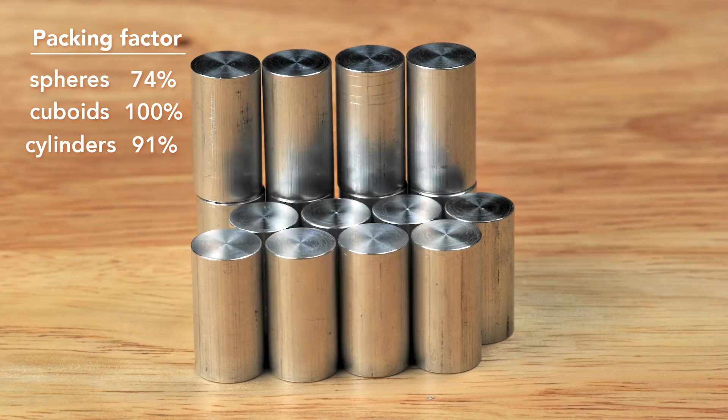But the cuboid surpasses the sphere in packing efficiency. It has almost no wasted space, although at the sacrifice of using more surface area to contain the same volume as the sphere. So, to create a can, engineers use a cylinder, which has elements of both shapes. From the top, it's like a sphere, and from the side, it's like a cuboid. A cylinder has a maximum packing factor of about 91%, not as good as the cuboid, but better than the sphere. Most important of all, the cylinder can be rapidly manufactured.

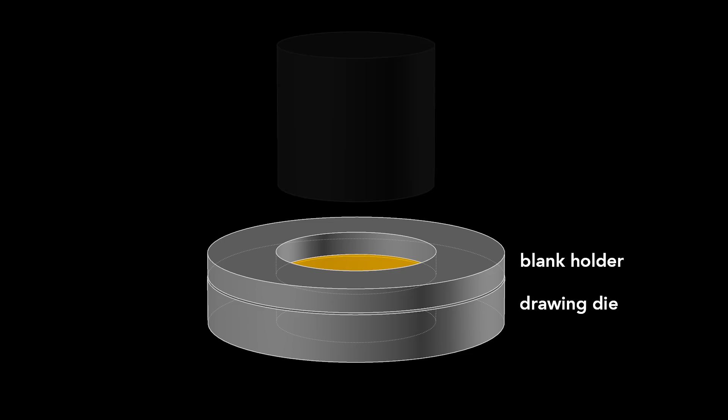The can begins as this disc called a blank, punched from an aluminum sheet about 3/10 of a millimeter thick. The first step starts with a drawing die, on which sits the blank and then a blank holder that rests on top. We'll look at a slice of the die so we can see what's happening. A cylindrical punch presses down on the die, forming the blank into a cup. This process is called drawing.

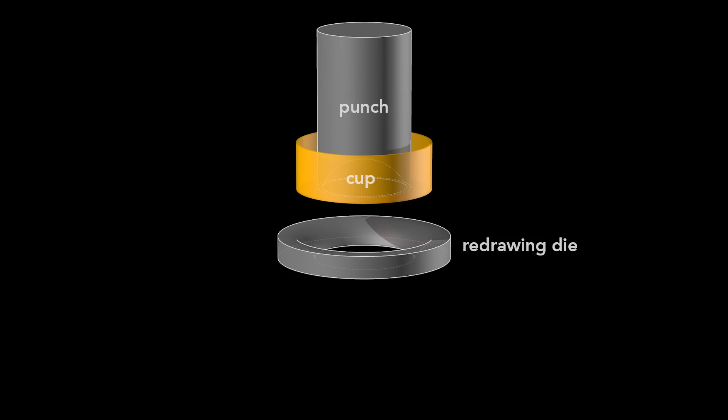This cup is about 88 millimeters in diameter, larger than the final can, so it's redrawn. That process starts with this wide cup and uses another cylindrical punch and a redrawing die. The punch presses the cup through the redrawing die and transforms it into a cup with a narrower diameter, which is a bit taller.

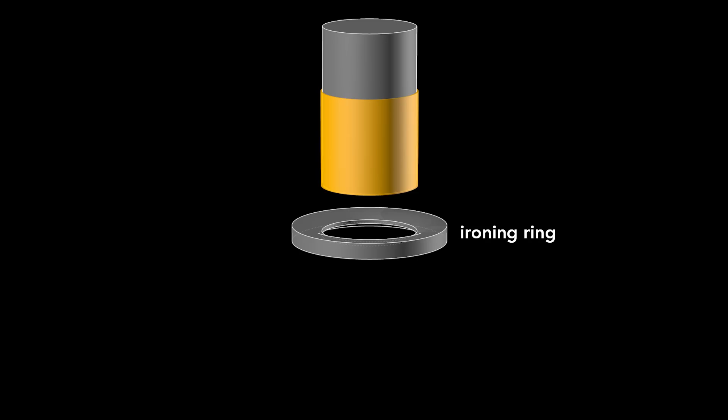This redrawn cup is now the final diameter of the can, 65 millimeters, but it's not yet tall enough. A punch pushes this redrawn cup through an ironing ring. The cup stays the same diameter as it becomes taller and the walls thinner. If we watch this process again up close, you see the initial thick wall and then the thinner wall after it's ironed. Ironing occurs in 3 stages, each progressively making the walls thinner and the can taller.

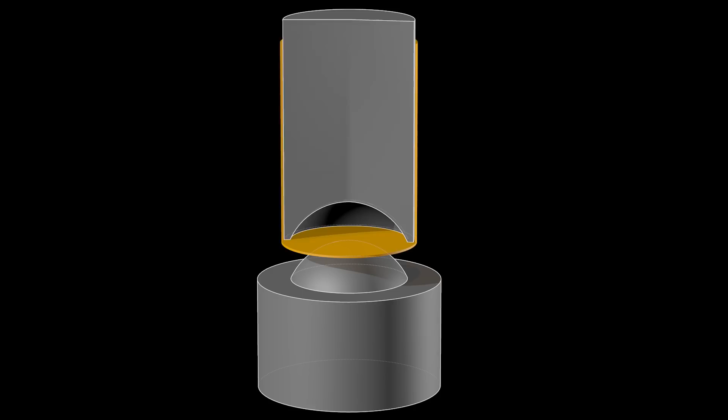After the cup is ironed, the dome on the bottom is formed. This requires a convex doming tool and a punch with a matching concave indentation. As the punch presses the cup downward into the doming tool, the cup bottom deforms into a dome. That dome reduces the amount of metal needed to manufacture the can. The dome bottom uses less material than if the bottom were flat.

A dome is an arch revolved around its center. The curvature of the arch distributes some of the vertical load into horizontal forces, allowing a dome to withstand greater pressure than a flat beam.

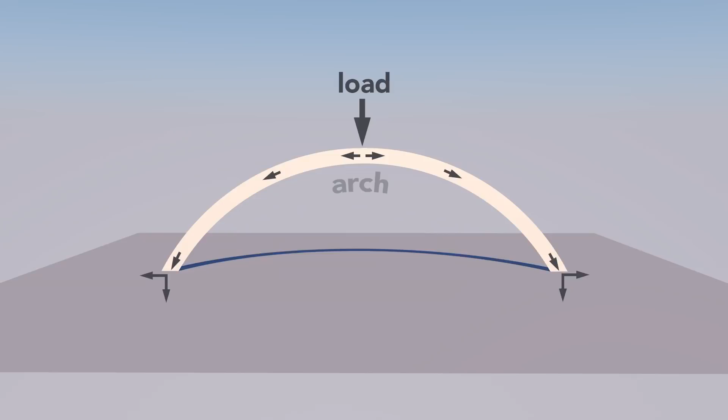On the dome, you might notice 2 large numbers. These debossed numbers are engraved on the doming tool. The first number signifies the production line in the factory, and the second number signifies the body maker number. The body maker is the machine that performs the redrawing, ironing, and doming processes. These numbers help troubleshoot production problems in the factory.

In that factory, the manufacturing of a can takes place at a tremendous rate.

These last three steps, redrawing, ironing, and doming, all happen in one continuous stroke in only 1/7 of a second. The punch moves at a maximum velocity of 11 meters per second and experiences a maximum acceleration of 45 Gs. This process runs continuously for 6 months, or around 100 million cycles, before the machine needs servicing.

Now, if you look closely at the top of the can body, you see that the edges are wavy and uneven. These irregularities occur during the forming. To get a nice, even edge, about 6 millimeters is trimmed off the top. With an even top, the can can now be sealed.

But before that sealing occurs, a colorful design is printed on the outside. The term of art in the industry is decoration. The inside also gets a treatment: a spray-coated epoxy lacquer separates the can's contents from its aluminum walls. This prevents the drink from acquiring a metallic taste and also keeps acids in the beverage from dissolving the aluminum.

The next step forms the can's neck, the part of the can body that tapers inward. This necking requires 11 stages. The forming starts with a straight-walled can. The top is brought slightly inward, and then this is repeated further up the can wall until the final diameter is reached. The change in neck size at each stage is so subtle that you can barely tell a difference between one stage and the next.

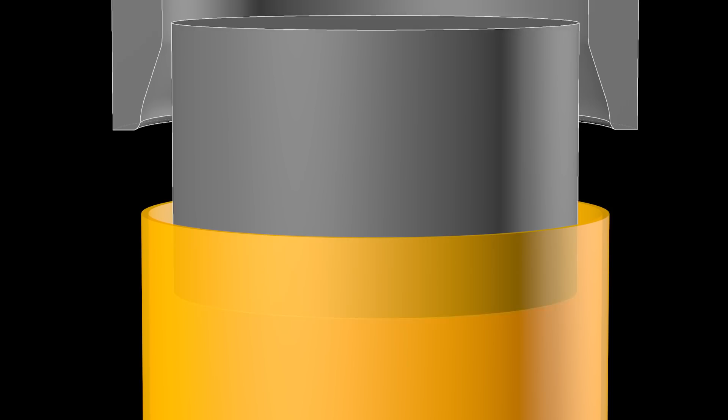Each one of these stages works by inserting an inner die into the can body, then pushing an outer die, called the necking sleeve, around the outside. The necking sleeve retracts, the inner die retracts, and the can moves to the next stage. The necking is drawn out over many different stages to prevent wrinkling or pleating of the thin aluminum.

Since the 1960s, the diameter of the can end has become smaller by 6 millimeters, from 60 millimeters to 54 millimeters today. This seems a tiny amount, but the aluminum can industry produces over 100 billion cans a year, so that 6 millimeter reduction saves at least 90 million kilograms of aluminum annually. That amount would form a solid cube of aluminum 32 meters on a side. Compare that to a 787 Dreamliner with a 60-meter wingspan.

Now, after the neck has been formed, the top is flanged. That is, it flares out slightly and allows the end to be secured to the body, which brings us to the next brilliant design feature: the double seam.

On older steel cans, manufacturers welded or soldered on the ends. This often contaminated the can's contents. In contrast, today's cans use a hygienic double seam, which can also be made faster. This can is cut in half so you can see the cross-section of the double seam.

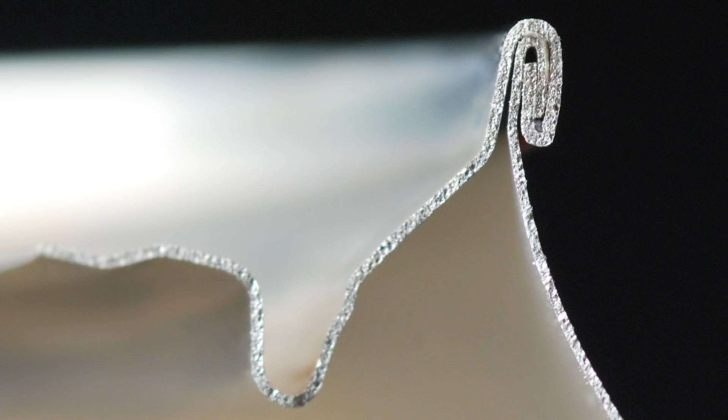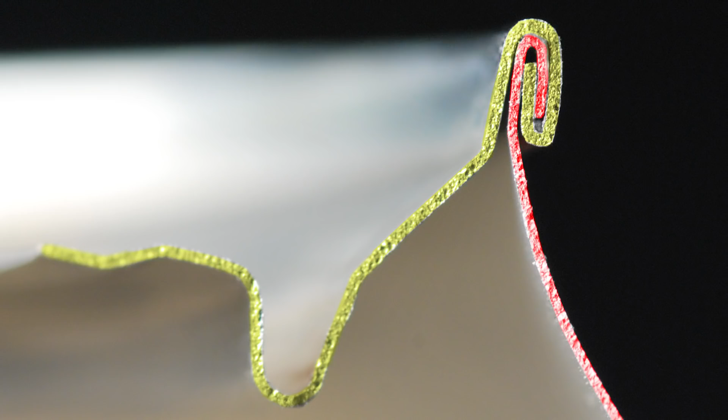To create this seam, a machine uses two basic operations. The first curls the end of the can cover around the flange of the can body. The second operation presses the folds of the metal together to form an airtight seal. While the operations themselves are simple, they require high precision. Parts misaligned by a small fraction of a millimeter cause the seam to fail.

In addition to the clamping of the end and can body, a sealing compound ensures that no gas escapes through the double seam. The compound is applied as a liquid, then hardens to form a gasket. The end, attached immediately after the can is filled, traps gases inside the can to create pressures of about 30 psi, or 2 times atmospheric pressure.

In soda, carbon dioxide produces the pressure. In non-carbonated drinks like juices, nitrogen is added. So why is a beverage can pressurized? Because the internal pressure creates a strong can despite its thin walls.

Squeeze a closed, pressurized can, it barely gives. Then squeeze an empty can. It flexes easily; the can walls are thin, only 75 microns thick, and they're flimsy. But the internal pressure of a sealed can pushes outwards equally and so keeps the wall in tension.

While initially pressurized to about 2 atmospheres, a can may experience up to 4 atmospheres of internal pressure in its lifetime due to elevated temperatures, and so the can is designed to withstand up to 6 atmospheres, or 90 psi, before the dome or the end will buckle.

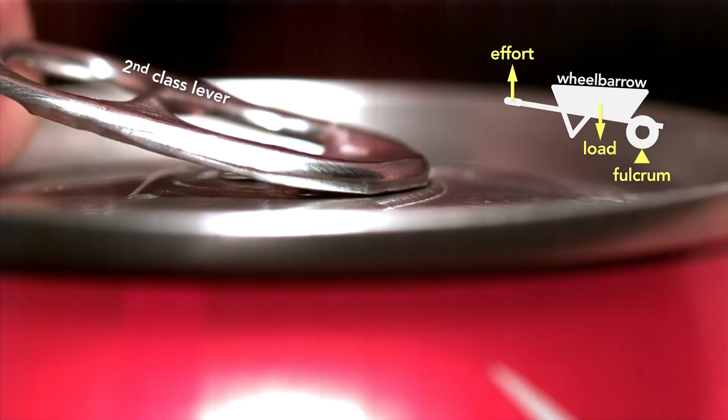This little tab involved clever engineering. The tab starts as a second-class lever—this is like a wheelbarrow, because the tip of the tab is the fulcrum and the rivet is the load. The effort is being applied on the end.

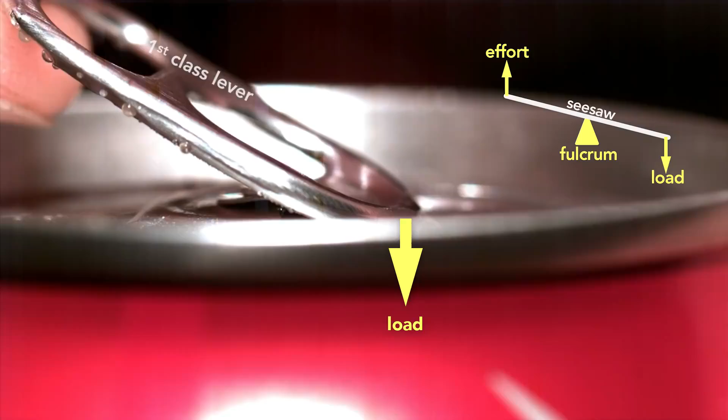But here's the genius part: the moment the can vents, the tab switches to a first-class lever, which is like a seesaw, where the load is now at the tip and the fulcrum is the rivet. You can see clearly how the tab, when working as a wheelbarrow, lifts the rivet.

If you try to simply force the scored metal section into the can using the tab as a first-class lever with the rivet as the fulcrum throughout, you'd be fighting the pressure inside the can. The tab would be enormous and expensive.